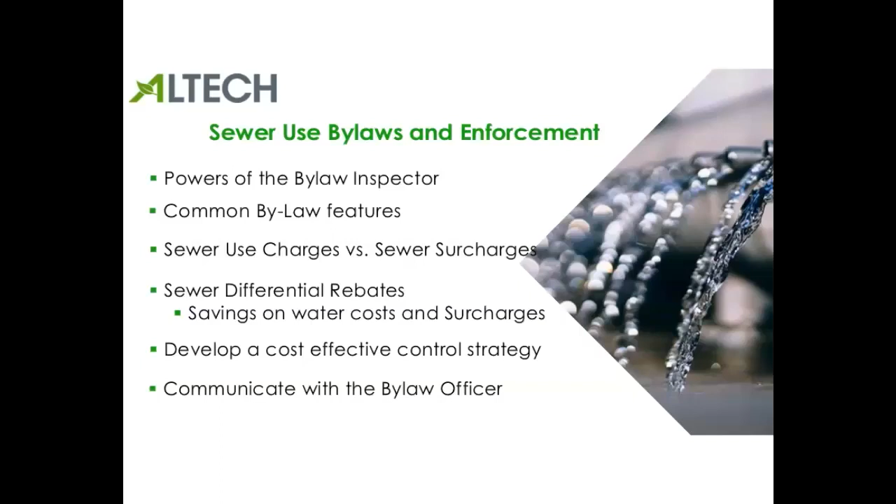I think in terms of establishing this relationship, the bylaw officer wants this relationship, because they know that they want your industrial activity in their region, that you're paying taxes and all the rest of it, but they have their own challenges in terms of making sure that you are compliant at the compliance manhole, and that they're doing their job. But as long as you have a friendly relationship, they're very easy to work with.

The other thing, Walter, just before we go on, is once you do establish this relationship, do what you say you're going to do. So be careful what you commit to, but whatever you do commit to, make sure you do it.

Right. The slide you see in front of you right now is just a quick formula review. You should understand the differences in the charges that you may be paying at your facility. Obviously, you're paying for the water coming into the facility, but you certainly will be paying sewer charges. That is, you're paying for the water that you're discharging from your facility. Now, for certain food plants, that is only a percentage of what you actually brought into your facility. So that gives you the opportunity to perhaps pursue rebates from the municipality for that water that you're not discharging.

Let me give you an example. If you're in the beverage industry, of course, you're going to be using some water in your product. But even evaporation, if you're cooking, you're buying water and it's evaporating as steam. That's a differential. Cooling towers have a water use differential there. Absolutely. There's a lot of different ways.

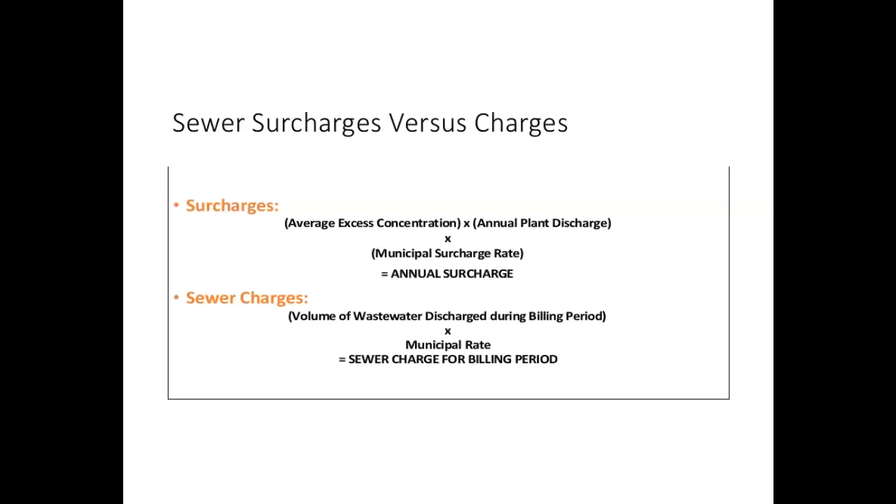So while you're filling out the poll, I want to acknowledge one of our attendees, a former employee of mine, Darren Borden, who now indicates that Kitchener needs an engineer stamp, as well as York Region, for water use rebates. Thank you, Darren.

So we've had a few who have never had a visit, fortunate ones, but you need to keep your eyes and ears open depending on the jurisdiction you're in. And again, we can give you a lot more insight after the call. You can just email your questions in, and I'm sure that someone from Altech will get back to you. Surcharges are a common form of pay-to-pollute regime. And then we have a couple that are in the midst of needing some capital solution. Alex will go through some of the approaches towards the end, but happy to provide further details.

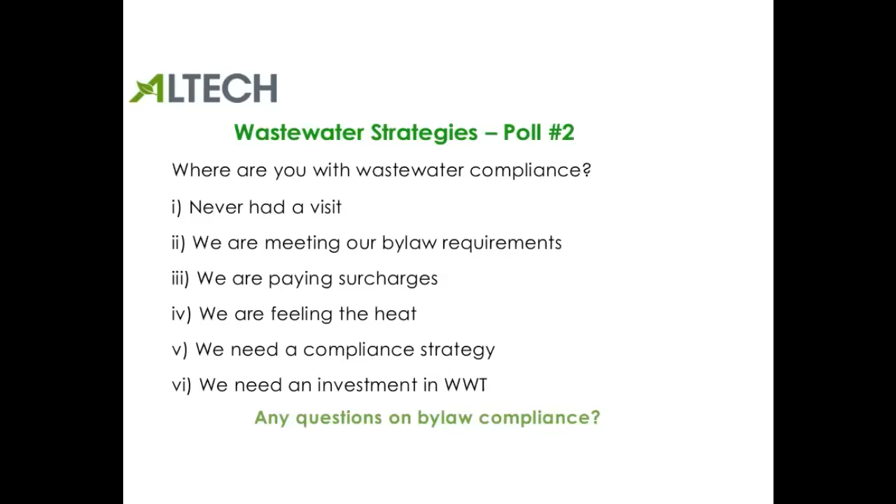And before we go on to the next slide, also for the City of Toronto, if you can demonstrate compliance with your sewer discharge limits, including those that you are subject to under a surcharge agreement, the other benefit you have is obtaining your water at a preferred block rate, a block 2 rate it's called. So that's another benefit that is available to you in the City of Toronto.

So let's now give you a bit of an overview of what the wastewater profile for the food and beverage industry looks like. The typical parameters of concern that you would be dealing with are BOD and COD. BOD is biochemical oxygen demand. It's a 5-day test. Sometimes municipalities use carbonaceous BOD, but this is basically a measure of the quantity of biodegradable organic matter contained in your wastewater.

This organic matter is evaluated using the oxygen consumed by the microorganisms involved in natural purification mechanisms. This is what the treatment plant needs to treat to meet even lower discharge levels, much lower than what you are subject to. Chemical oxygen demand is a variation of this type of measurement. The big difference is that it can be a lab desk test that takes you an hour versus the BOD test, which is 5 days.

Where it becomes useful is you could establish a BOD to COD ratio for your facility if you do simultaneous tests, and then rely on COD to give you some internal heads up. TKN is another organic matter measurement, significant for dairies and for meat operations. Total suspended solids is what the name suggests. It's the filterable material that exists in your wastewater, which also contributes to your BOD and COD levels.

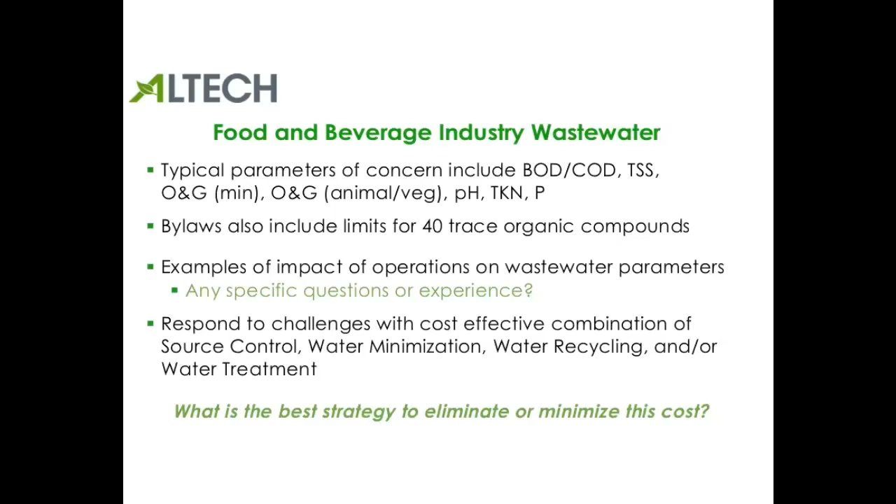So we're going to get into some strategies now, and I'll quickly go through this list, but then we have some examples to show you. This list here is just a short excerpt of what things you need to pursue. What we want to emphasize here is that in addition to training your staff on best practices, or as we call good environmental practices, it's really important to remember that they need refreshers, right?

These are tasks that take time for people to get used to doing, because it often is a significant change in their approach. So refresher training, we can't emphasize that enough. And it's also very important to give people feedback on how their changed practices have improved your discharges, and we'll show you some examples of that. If you can go on to the next slide.

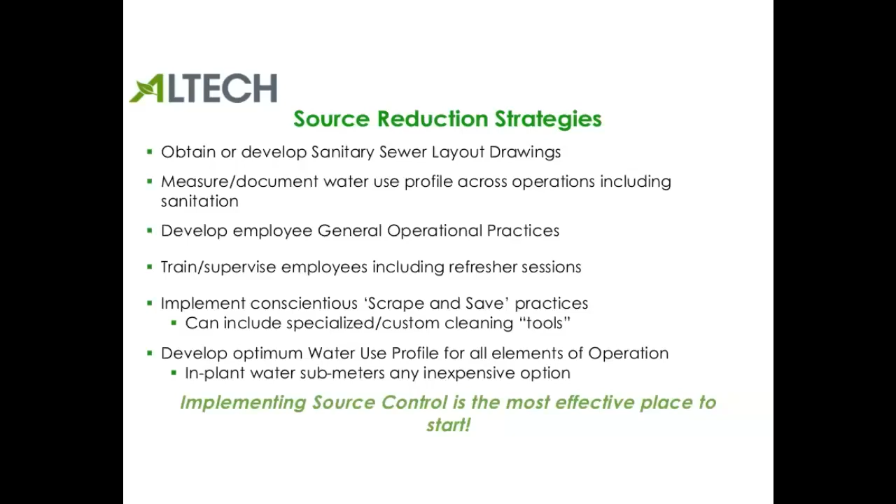The first thing you need to know is, where is your wastewater going? So do a simple drain line drawing for your facility. You may have professionally drawn drawings for your facility, but we've run into a lot of smaller operations where those need to be created internally. And it doesn't have to be a blueprint drawing. This is an example of one that was done in Excel, by somebody very good in Excel who could lay out

equipment. And you need to know where your drain exit points are. Where is your compliance manhole? You may have more than one at your facility. So those are things that can be done internally. If you don't know where your drains are leading to, you can do dye tests, but this is something certainly Altech can help out with.

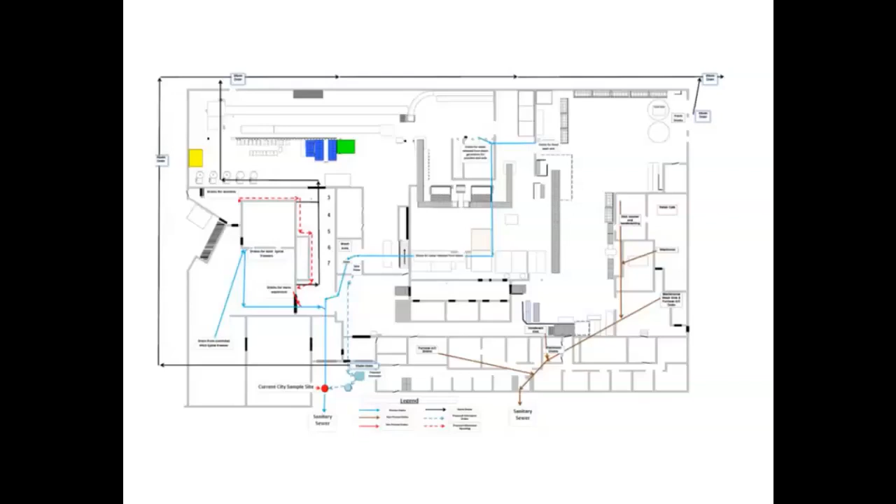So if you find that you are having more visits from your local bylaw officer or getting notices of violation, you need to take a deeper dive into what's happening in your operation. By deeper dive, I mean not just measuring your water intake and consumption on a daily basis. We now want you to look at your operation on an hourly basis and equate your water usage to the activities that are happening inside the plant, be they sanitation, right through to the type of product you're producing.

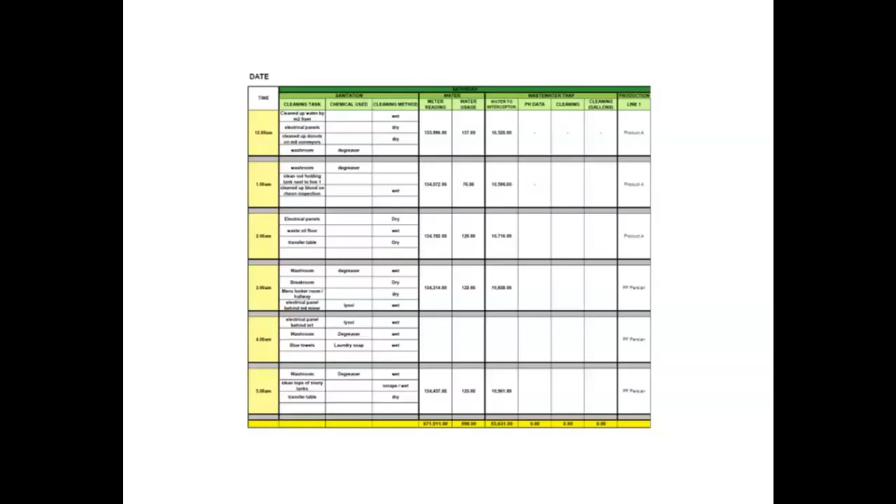And this will very quickly give you an indication as to where you need to fish. Obviously, the quantity of water discharged associated with the sanitation activity or production activity will be a good indication. So, Walter, how do our plants develop this chart? Basically, it can be done even in terms of supervisors telling management how many times they do a batch, for example, and how big is the tank, right? And put that number together. And in many cases, that might be the first time anybody's ever done that.

At the same time, I wanted to point out that better information is flow meters, and flow meters can be a relatively cheap way of doing this. Right, and you can either install them in line or you can clamp them on lines. And so you can have a set of flow meters that you can deploy to a critical area to do further analysis.

Once you've been able to troubleshoot a production week in your operation, understand your heartbeat, it's also important for you to track your wastewater results. The bylaw officers will be sending you their analytical reports, and these are things that you can tabulate. And as you start making improvements to your facility, in your trend graphs you'll be able to spot where your improvements started to take hold.

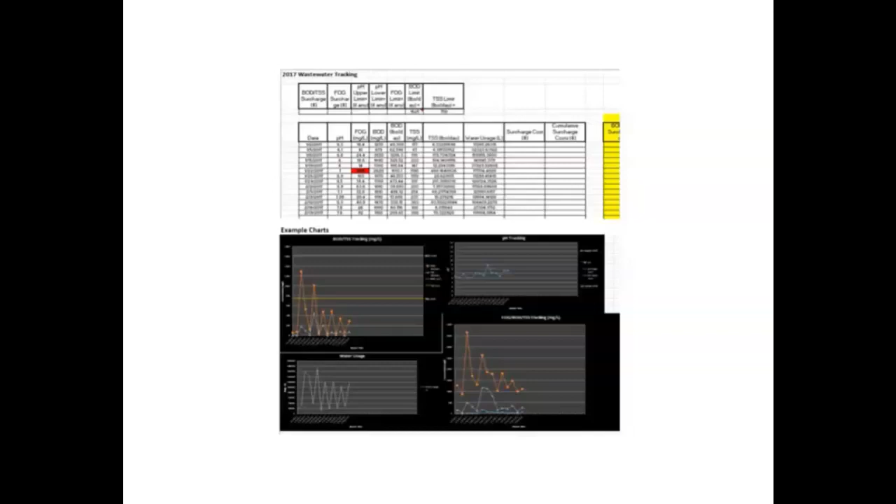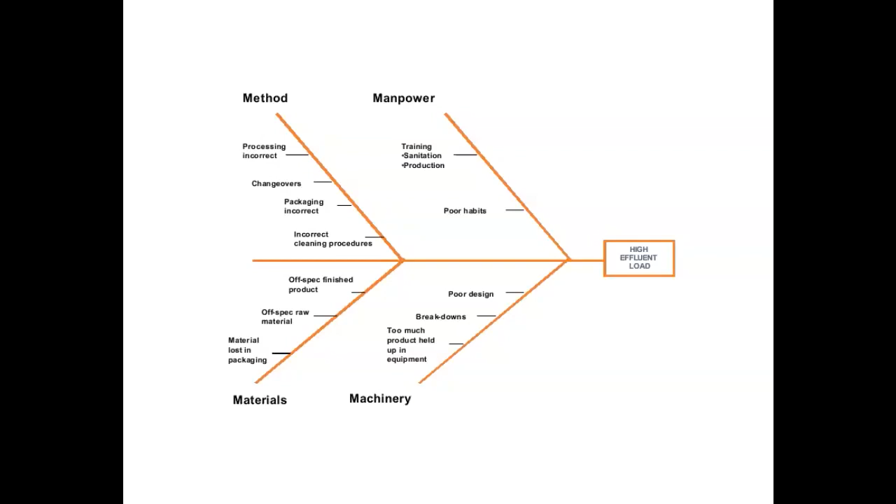And in the next few slides, you'll just see some of the opportunities that may exist in some of your operations. Leaking pumps, transfer points. These are all things that will add to your wastewater load if that material isn't recovered and diverted to some other means, such as food waste. And Walter, isn't that lost product? It's lost product, absolutely. Isn't that good maintenance? It's good maintenance. It's employees being aware.

It's also a safety hazard because often these things spill onto the floor and become slip hazards. So look at your transfer points. Putting a bin underneath a transfer point is just a bandage on the solution. Try to understand why you're losing product at those transfer points and make the necessary corrections there. It is lost product, and we do have a means to reverse engineer your wastewater loads into a very basic estimate as to what that means in terms of lost products for a specific facility. So reach out to Altech for that.

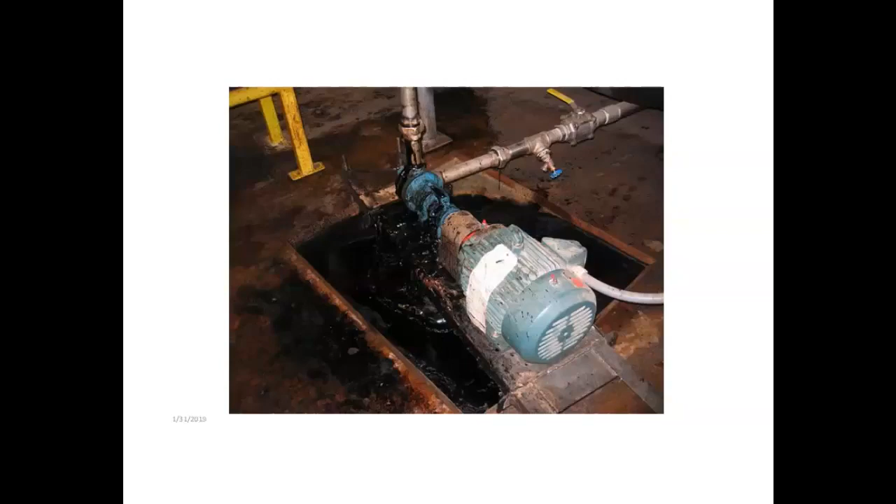Or you could put it into a food grade bin for use the next day if you're running the same product. And of course, whatever is left in that bin is actually lost product as well. Right. And we can't forget about what's being left in pipelines themselves when you do wash down. So there are engineering solutions to that in terms of product recovery.

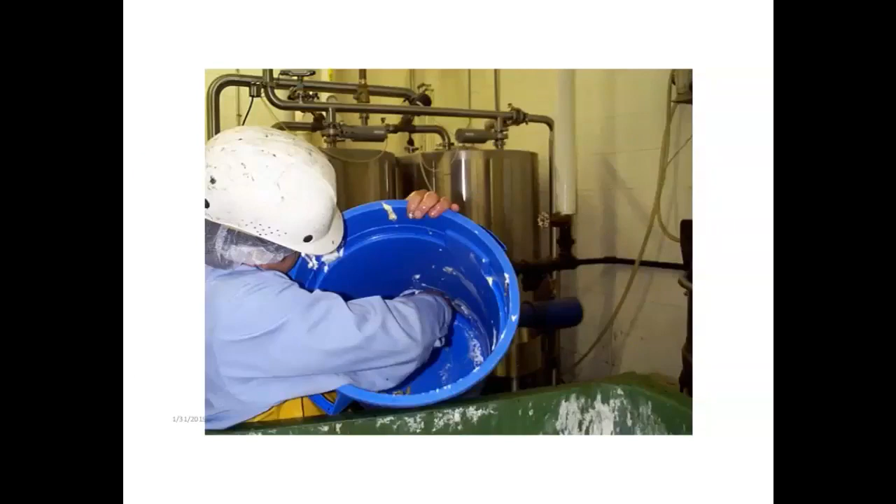Sometimes you can either get tools custom made, which is a pretty cheap solution, or you can find a tool from a different application and bring it over to this application. Right, and he's using a $5 or $6 bakery soft scraper there, and he's probably saving 10 times that in a potential surcharge for the volume that he's dealing with there. So it's a simple tool.

Before we go on to our next poll, I just wanted to, again, give you some numbers related to a pie operation that has a 3,000 milligram per liter average concentration and discharges 48 million liters per year. Running just down to the bottom, that's equivalent to close to 2.8 million pies a year of product if all of those pies were being sent down the drain. So there are various mechanisms that we can use to perk management's ears up if that is one of the challenges you're having. And that leads into our next poll.

So where are you with your implementation of source control? Have you implemented source reduction strategies? You're in the process of doing so. You've not done anything yet, or you haven't started because you just can't get buy-in.

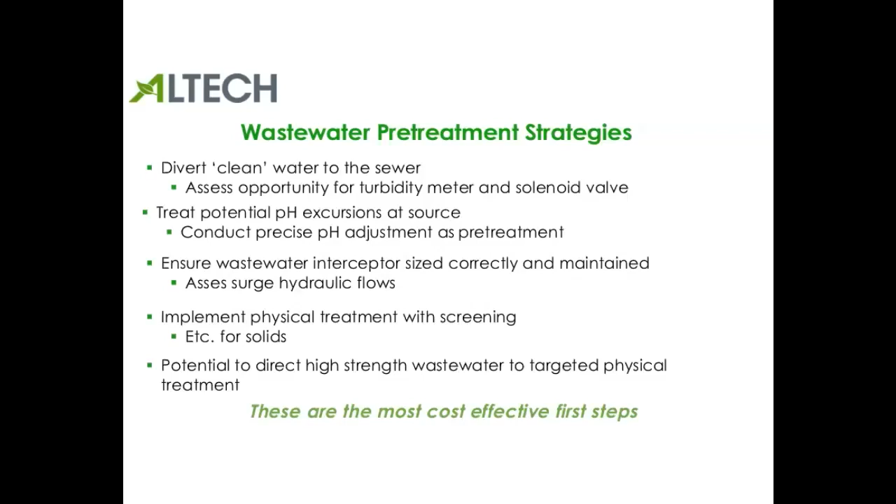Yes. The next level up would be potentially to direct high-strength wastewater to a targeted physical treatment system. That would be the next level up. Again, the savings there would be the fact that the hydraulic flow would be less, and therefore your overall capital would be less. For those of you fortunate to be in the midst of planning for a major expansion or new build, if you can isolate the sewer lines that are carrying the high-strength wastewater and separate them from the lines that are carrying the low-strength, that provides you with another opportunity to potentially reduce the size of your capital needs to treat.

Next slide is the active wastewater treatment. So what we've done is we've listed more active wastewater treatment in an escalating order of capital required. And the easiest thing, the cheapest thing to do is flow equalization and wastewater interceptors, again, making sure that the interceptor is sized large enough. But also, flow equalization is always going to be a big issue in wastewater, even if you wanted to put that in as an interim and add more treatment equipment in the future. You still need flow equalization.

The next level up would be active physical treatment, which would include an integrated physical screening system, as we've just discussed. Or the next level would be a coagulation flocculation system, which in food actually has quite a number of applications. Coagulation or flocculation would mean that you're taking the food contaminant out of the liquid and creating a solid out of it and then removing the solid. For example, milk. Milk and dairy products contain milk fat, which can be coagulated and then flocculated into a larger solid and then removed in some form or another.

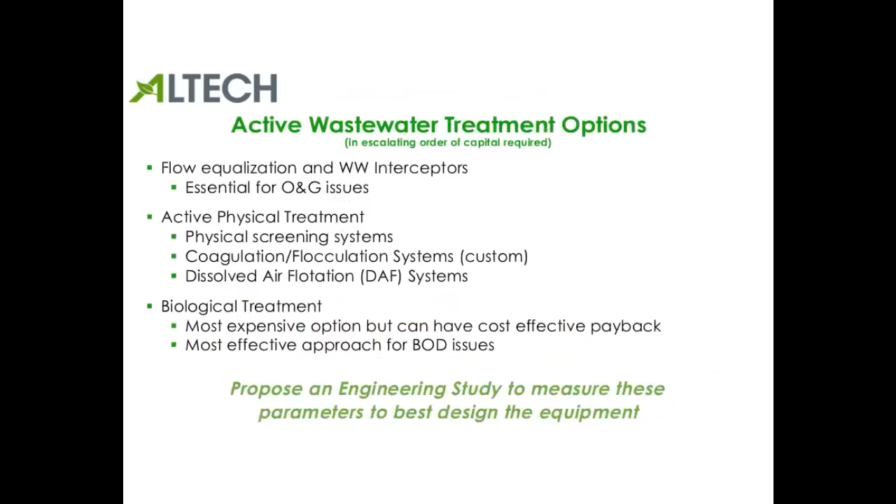So in terms of time, I'm going to just go over. The next slide is steps to implement a solution: step 1, assess production; step 2, characterize the effluent contaminants and flow. So contaminants as well as flow measurements separately, and then combine them together to come up with a wastewater treatment and equipment strategy. Next slide, please.

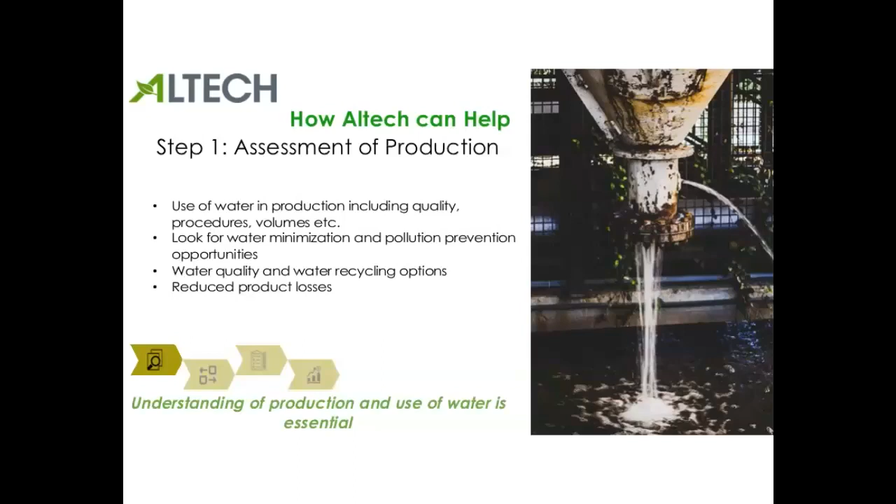So step 1 is assessing production, and I think Walter's gone through that in quite a bit of detail. The fact is that once you've done that assessment, you can decide where you can do water minimization. For example, Walter, first flushes don't need clean city water. You may be able to use recycled water in some form, right, as long as it's good enough quality. Right. At a number of my previous facilities, what they did is they actually containerized their first rinses. And while there was a cost associated with the disposal of that liquid, in effect what they were doing was avoiding the speeding tickets of exceeding their surcharge agreements. So you have to weigh your options.

The next slide is accurately characterizing the flow and the contaminants. And so, for example, as I indicated earlier, flow meters are relatively cheap. Portable ones, Walter, you mentioned, they're easily rentable. And installing flow meters gets us very accurate flow information, including surge flows, sanitation, and the like.

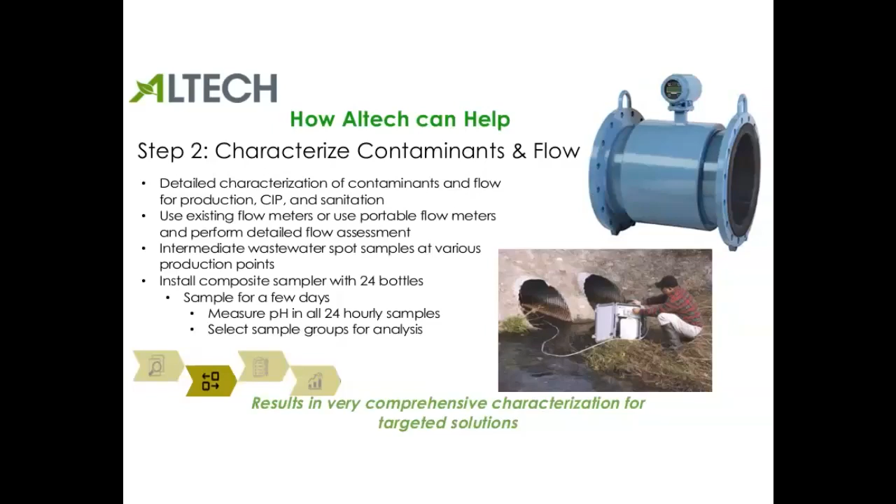One of the tricks that we use in characterizing effluent, which is really helpful, is doing a composite sample at the discharge using 24 separate bottles, which gives you an hourly reading of production, where we can actually measure pH by the hour, as well as take a visual look at the samples to see what operation. You can link the sample back to selected operations, as well as group samples together to analyze them. And use that water use diary that I mentioned earlier on.

So you're basically aligning it together with your results, and you have a really good indicator as to what's happening in the operation. Very accurate. Very accurate, yes. The other, very quickly, is assessing current equipment and layout. In addition to everything else we can say about wastewater treatment, space is always going to be something to be considered, and we need to fit into existing space. Otherwise, building a new building gets included in the capital. We should just go to the next slide.

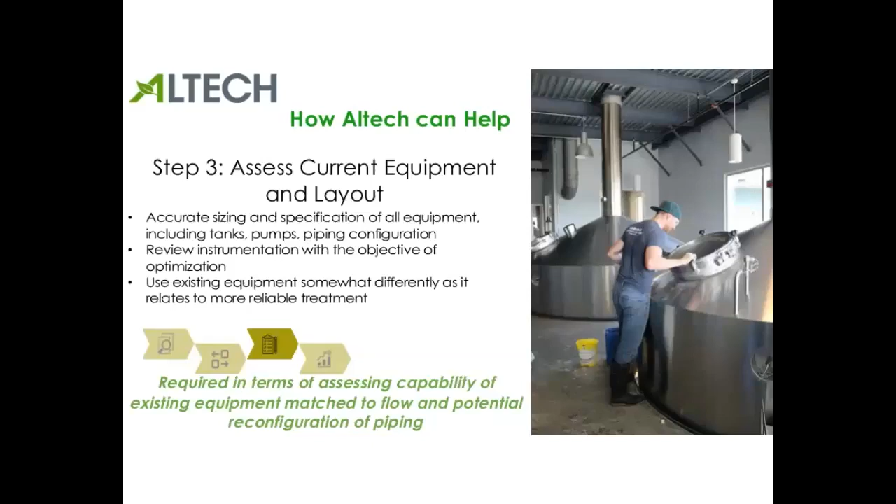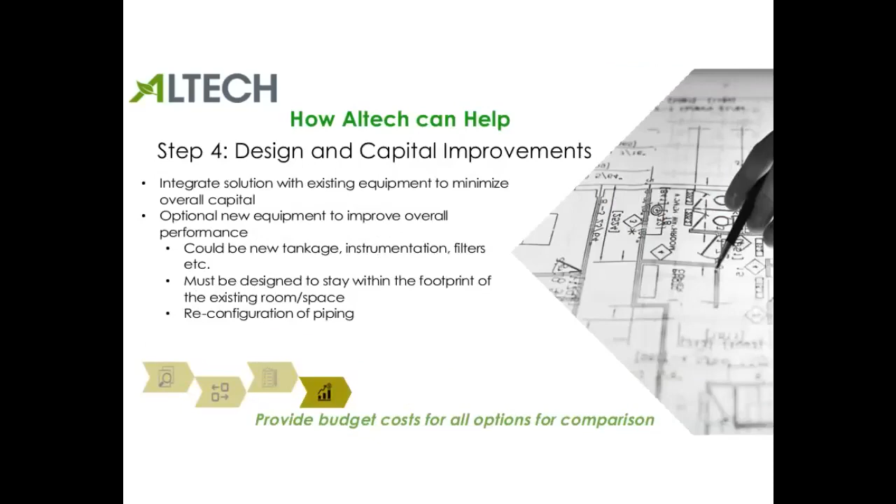And so, finally, with all of that information, which we skimmed over, but it's something that we can work with you on, is to design. Now you have all the information to design and plan the capital improvements, and you're able to put the budgets together in the most cost-effective way. So because we're close to one, I'm going to go straight to the pictures. We're ending with a couple of slides of example situations.

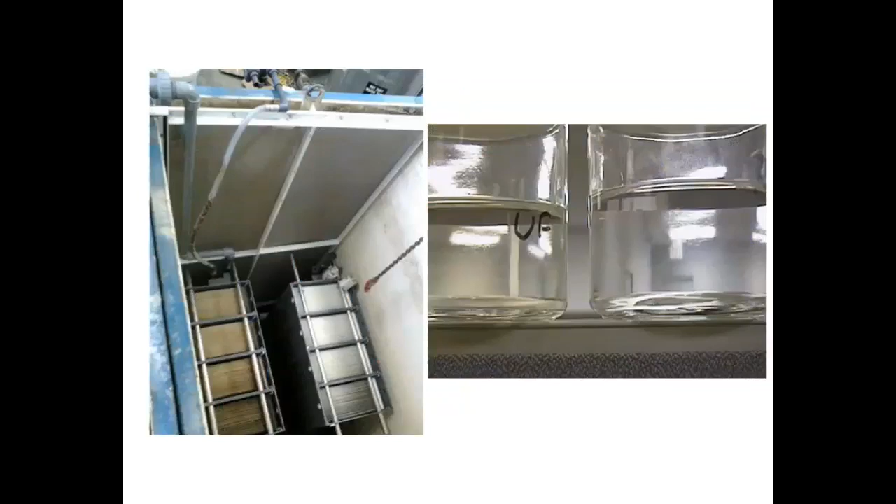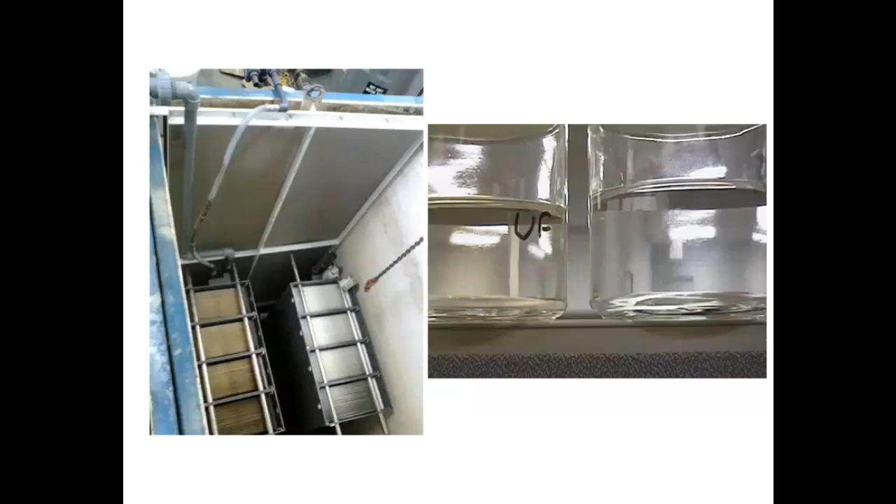Out of the biosystem, you can see on the right picture, the left beaker is the result coming out of the biosystem, which in this case was upgraded to drinking water standards. And on the right-hand side, that's the drinking water, the resulting water after reverse osmosis. In terms of the biosystem, on the left side you can see the clarification system. This is a membrane bioreactor, and this is a picture of the membranes. That's actually sunk in the blue tank that we saw earlier. Next slide, please.

Okay, it's 1 o'clock or just shortly after, and we had one question. The question is, how long is the complete system cycle for the apple juice treatment? Alex, do you know how long the cycle is from start to finish? Is it 24 hours, 12 hours? It's a flow through, but the residence time in the biological chamber is 10 to 12 hours. And that is one of the parameters that dictates the size of the unit. Flow times residence time. Okay, I think that was all the questions.